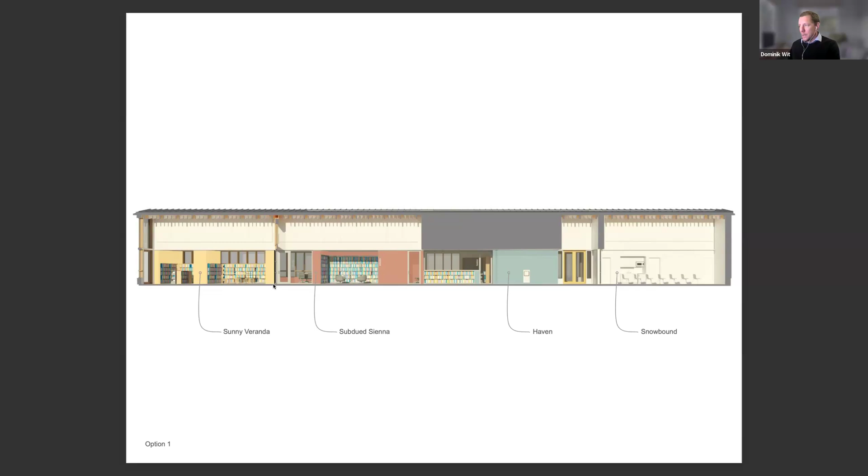I wanted to describe that, and then give you this slide which shows three different options. We had a few working meetings with Elaine, Jeff, and Mary Anne, and we took in all the comments and previous presentations of color that Odinzello had presented to the group. We took the various comments from the committee along with our own sensibility for what the colors should be, and started to explore that in these three options.

Initially, Odinzello proposed a more cool palette, more in the blue hues, to the point where we really stayed with the blues. Then as we were exploring different floor finishes, we started to present options—could there be yellows, could there be greens and different colors? We used all of that as a baseline, but in our discussions as a small group, we really felt there was a need for earth tones, so we wanted to, as you can see here, work with a similar palette.

Option 1 is where we started. We were looking at incorporating greens, which tie into the green hue of the slate—the slate on the exterior of the building has a green hue to it—and we thought we'd also change some other elements.

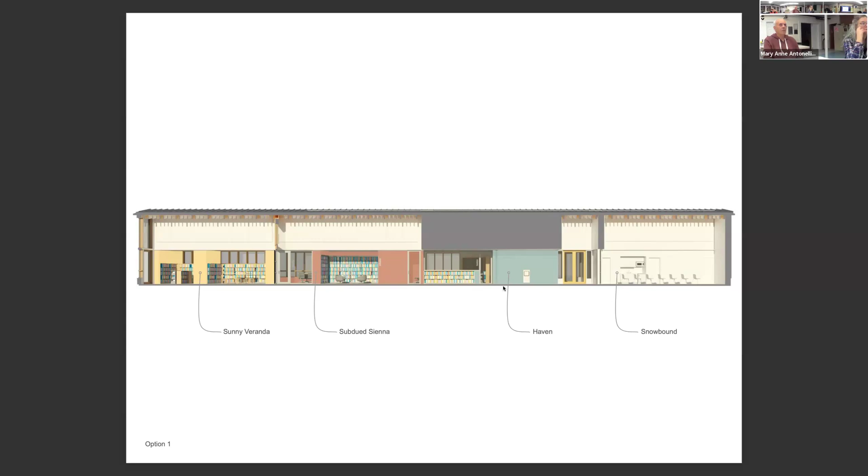The boards we have here look a little different than the boards you have, because I did some switching—I was assisted by the other people in the room. People are grumbling about how they don't match, but there are two greens, two corals, whatever, three terracottas, and two yellows. We switched the hazel on option 2 with the haven on option... no wait, option 3 is right, it's option 1 and option 2 where we switched the greens at the top, the haven with the hazel. Got it.

Initially we started with a more bold palette of green at entry, going into an earth tone in the adults area, which we felt was appropriate to that program, and then to a more accentuated yellow for the children, something with a little more pop. You can see here these are a more saturated version.

We also considered a cooler version of the green, starting to tie in a little bit of the blue, you can see the comparison there. What you see in front of you, option 1 and 2, are switched compared to what I have on screen. Then we started paring down what this earth tone beige color could be, along with a desaturated yellow. Option 3 is really kind of a combination or another play on those options. So this is where we landed.

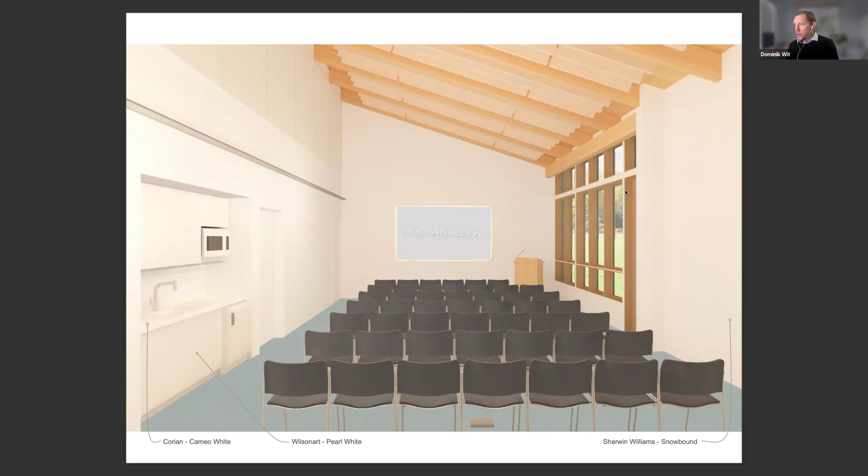As you enter the building and turn right from the lobby, you're looking at browsing, a library of things. One of the green selections here has a low ceiling—9 foot, so it's actually not as low, but comparatively it's low. There will be some borrowed natural light from teens and the staff workroom, and also behind us in the lobby you'll have some borrowed light coming into the space. But generally there'll be more artificial light here working with this green.

That green would turn into teens. And we're also— I'm sorry, Mary Anne? Restroom doors, what color would the restroom doors be?

I would suggest that we do the same color and make them go away, but we can study that. I thought they would be wood. No? I don't believe we have wood doors—I think we have primed doors to receive paint. I can double check that.

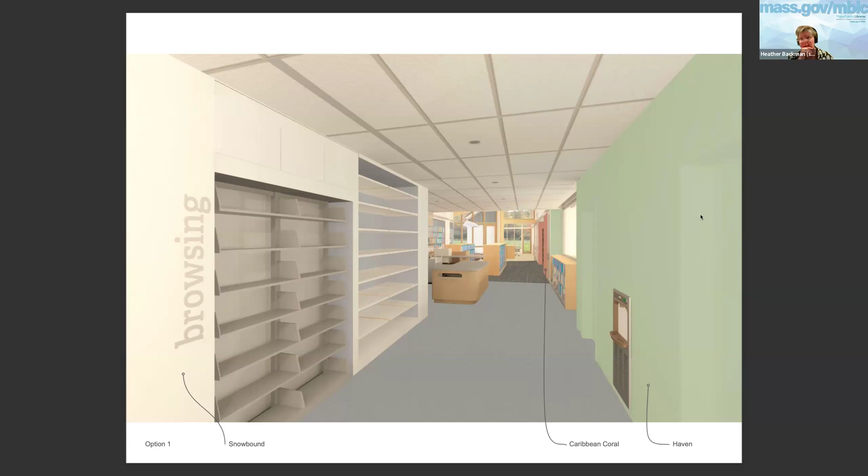For folks with low visual acuity, would it be better to have a door that doesn't blend in? I know there's also the aesthetics as well, but if somebody's in a rush trying to find the bathroom and they have difficulty distinguishing surfaces clearly, it might be good to have something that makes it easy for them to find that.

I think that's a valid point, Heather. One thing I do want to counter, though, related to this image: I don't think this fully represents it. The change in plane—the recessed door condition and the shadows created—would accentuate the fact that there's a recessed door there, more exaggerated than what you're seeing here. So this image doesn't truly represent how it would feel with the monochromatic color application. But I'd be happy to study a couple of elevations and maybe get buy-in from the group on a choice there.

Would they be paneled doors or flat doors? I didn't fully hear the question, Mary Anne. I asked, would they be paneled or flush? Are they flush doors, Tom? Flush, yeah.

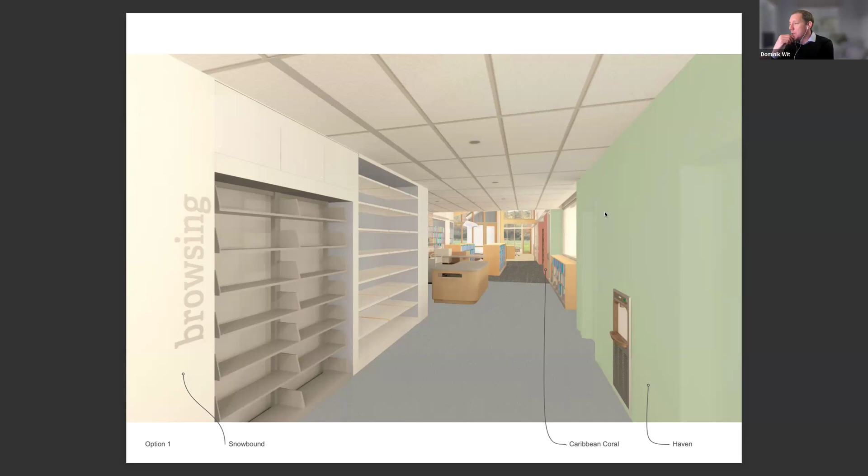Correct, it is a ways away. We're really closing the loop on a working group we've had internally with Mary Anne, Elaine, and Jeff to wrap up the interior finish selections entirely, or at least to a point where the last step is to evaluate this in the building. We'd like to be prepared when the building is ready to receive color, so we know what palettes we're working with and can go in without starting from scratch. That's why we're doing it now.

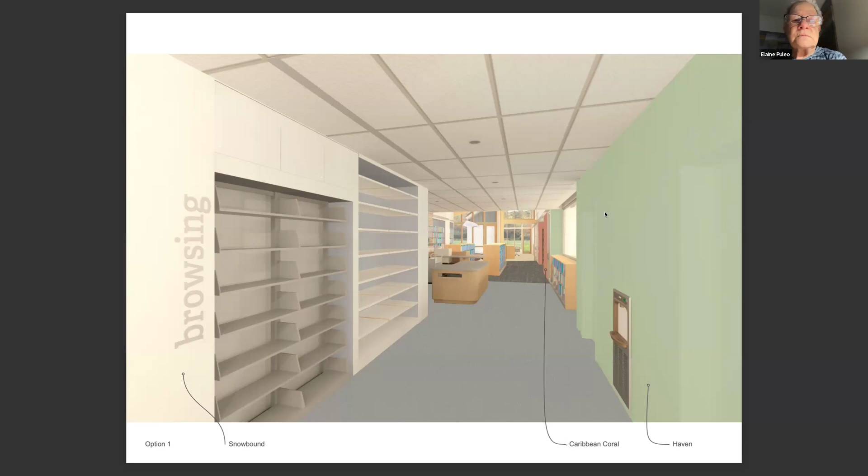So I have a couple other views to give you a sense of the comparative color selection here in adults. We're looking into the director's office to the right, with the shelving niches and white applied walls to the left, above this 9-foot datum, and the color turning in and out of the space to the right. Then again in children's, similarly, a different color used to the right, with this 9-foot datum and a ribbon of color applied to the right, juxtaposed to the condition on the left.

And we had a reverse view. Dominik, nice to see if you could—because the flooring we picked is not gray like that—it might be nice to see if you could substitute the floor color with something closer to the floor we chose. Because looking at that, I don't know if yellow's gonna look good next to that floor color. Didn't we hold it up? Is it possible for us to have a sample of the carpet?

Absolutely, yeah, it's our mistake not to have it with you tonight. The intent was to give you a comprehensive sense of it and be able to give you the true colors and finishes in person, paired with a presentation slide—it's very difficult to represent in a slide that's being projected on a different screen. The true color is not representative in the image you're looking at, that's for sure. So the intent was that you had the samples in front of you to help.

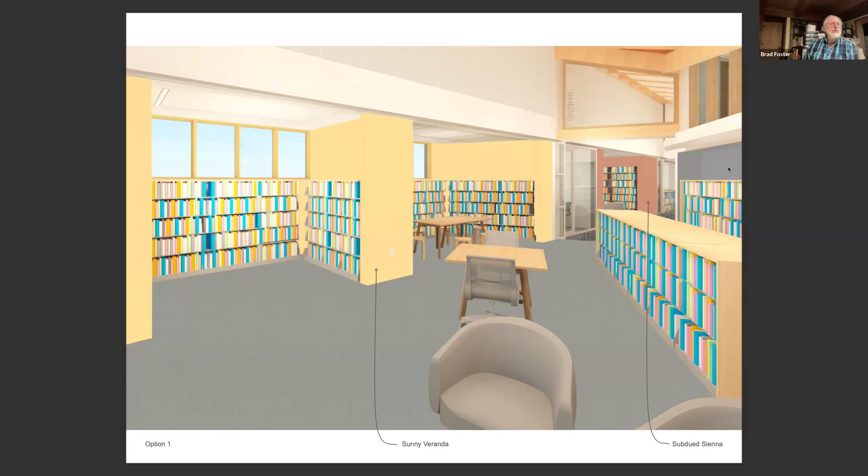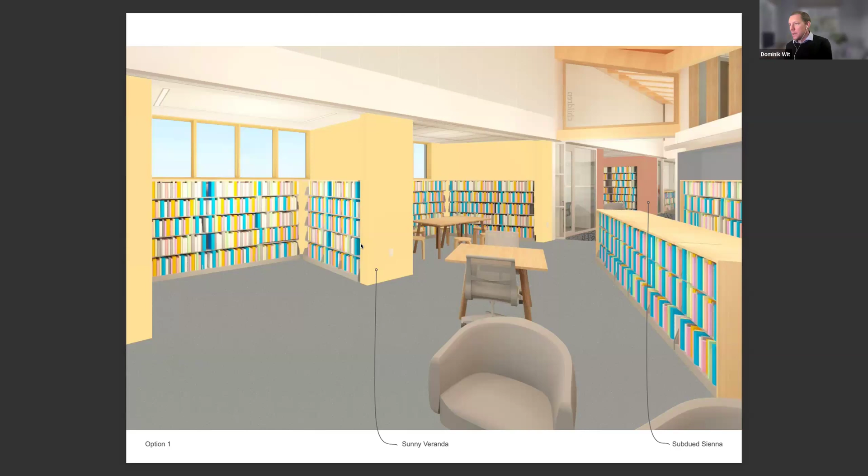And do we have any other inset shelves like that in a different section? So we do in adult. You see it there. We are also incorporating it in these break-out spaces for the children's room here. But just to note, there isn't a dropped soffit condition here, so it's open above. You can see here these shelves are nested within this end wall condition here - it's more of a solid wall with a niche.

You get a better sense of it here, right? It's a recess within a solid thickness of wall. And then in the adults, we do the same - there's a thickness to the wall with about a 15-inch recess or niche condition here. So we do it in adults as well. Okay, thank you.

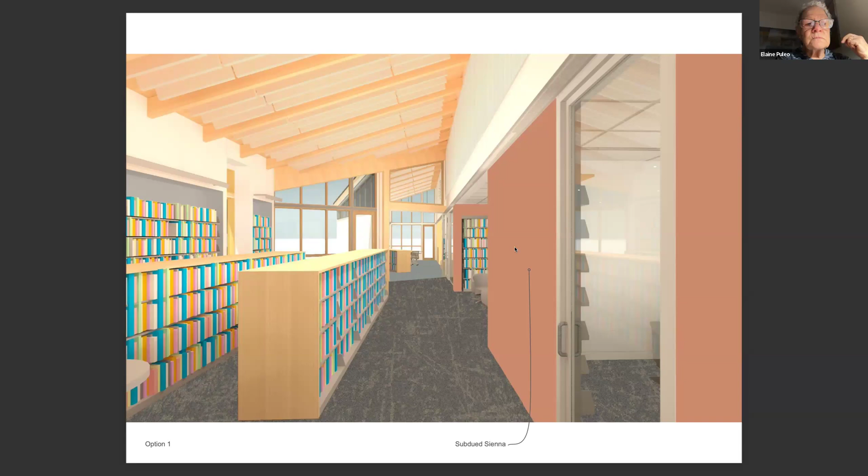Any other questions? I don't hear anyone. So I will assume that you are going to look at these. We will get the samples the next time you're at the construction meeting - I can bring them up next time and have them on site, and then potentially we meet again. I guess now that we are all here, potentially a more definitive response from the group might not be warranted, seeing as you don't have the floor finishes. I just wanted to see whether there was a general sense of heading in the right direction.

I think this is not radical, but there's been quite a change to a lot of the colors that we've presented over the history of the project, and just wanted to see whether we're more agreeable in an agreeable zone. When the subcommittee was talking about colors, did you have the floor sample and the carpet sample and the slate sample? We did, yes. Maybe that would help. Yeah, that would help me a lot.